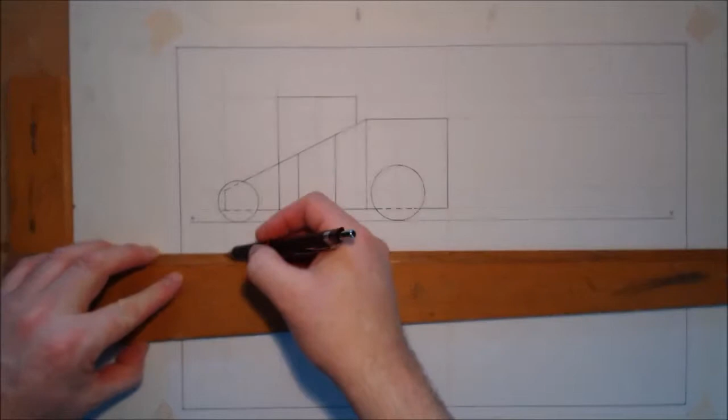Okay, I'm going to continue on with this drawing here now, and I'm going to carry on and set up the plan. Come down a distance from my XY line, draw a horizontal line across. Now,

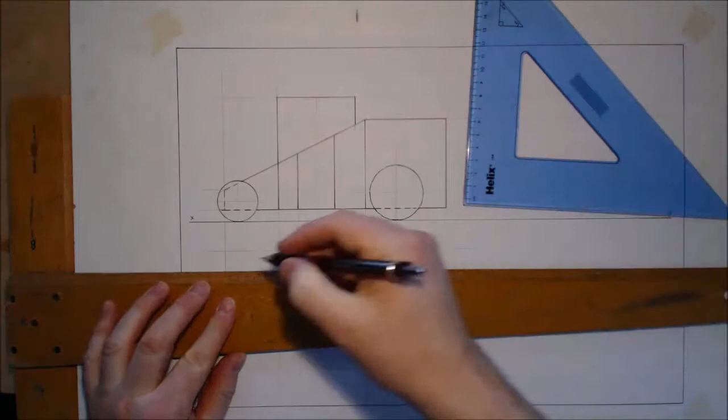I have my drawing set up, my exam paper set up beside me, and I'm working through the dimensions. So, starting off at this line here, off my drawing, I have 15mm thickness of the wheel. So I draw a line across there, 15mm. Then I come down a further

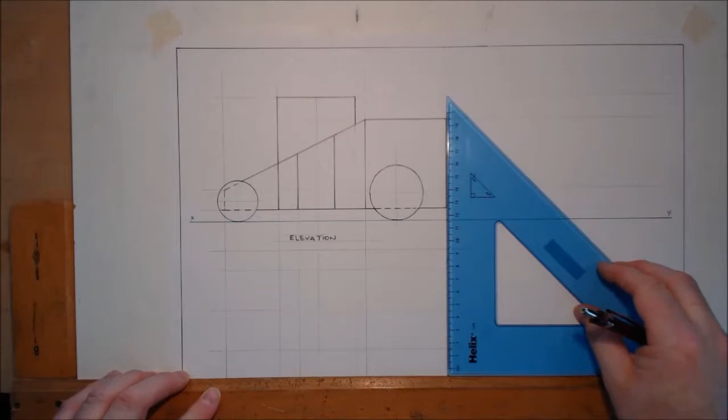62. Now it's actually 31 and 31, and I'm going to need that line in a minute when I go to draw my circle for the cylindrical engine part in the middle. So 31 and 31, and then the last part, which is 15, 62, and then here's my wheel here again, which is a further 15.

So just so a few things stand out, or so I can put a bit of shape in this drawing, first thing I'm actually going to do is take down the sizes of the wheels, and I'm actually going to heavy them in because it'll just help me and help you see the picture of what we're drawing.

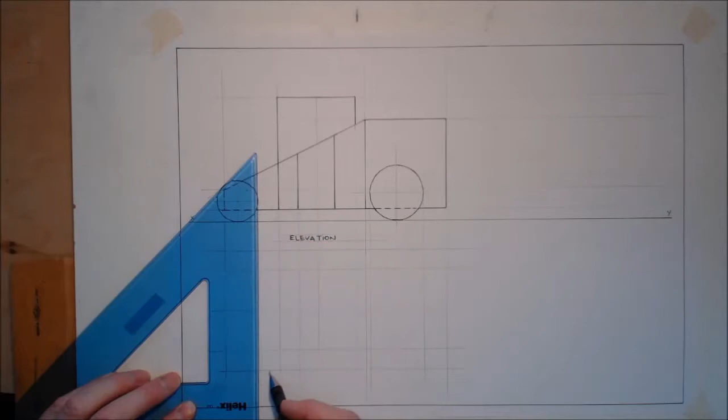Now I've put up a 3D model of this. I've created a link in the folder 2012 higher level question 1. If you follow the link, it'll give you a 3D model, and that will help you as well to see what's happening in each view as we're turning it around. So it's all set up there for you.

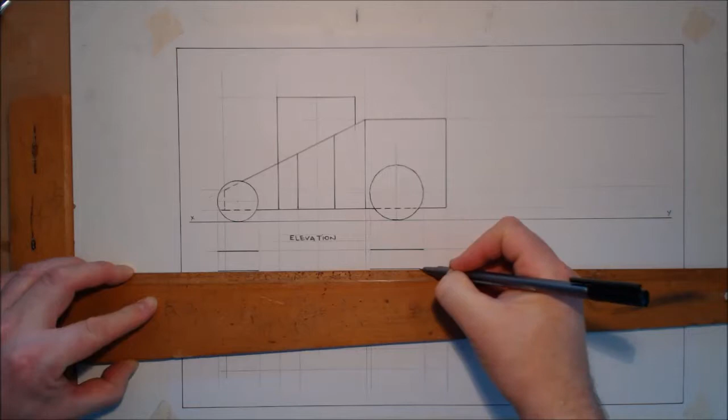Drawing in the wheels anyway first, that's what we're doing here. And of course the wheels are made from cylinders. We see them as a circle here, but when we look down on top of them, we see them as rectangles.

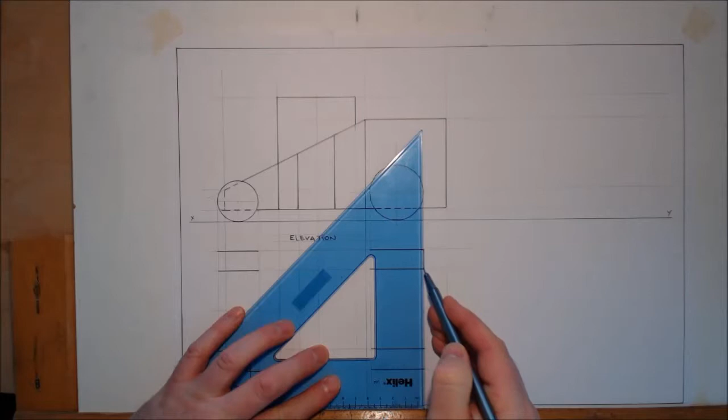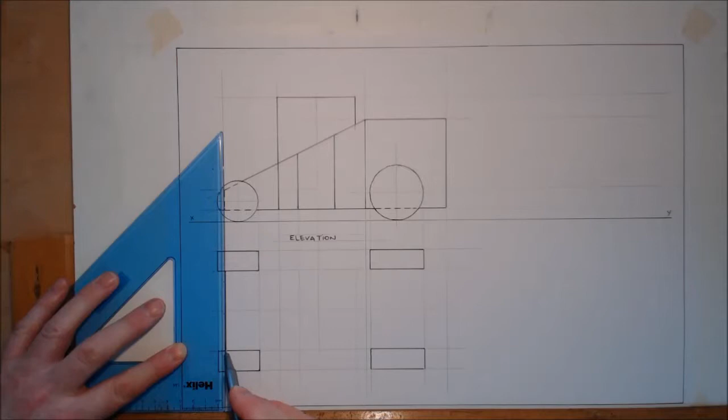So there's the small wheels at the front and the wheels at the back. And I also have that edge there, which can go in along there. And my grass box at the back comes in as far as that edge there, carried down, which is to there.

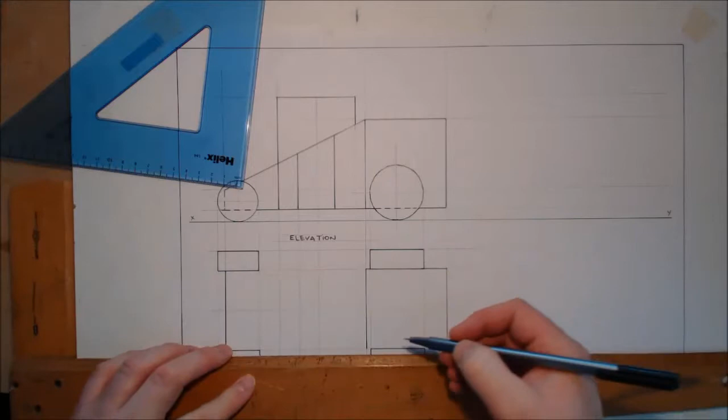Okay, so there's a good bit of information in my drawing there already. Now, there's this area here where that piece sticks out to the side there and there. That's the area we're going to work on next.

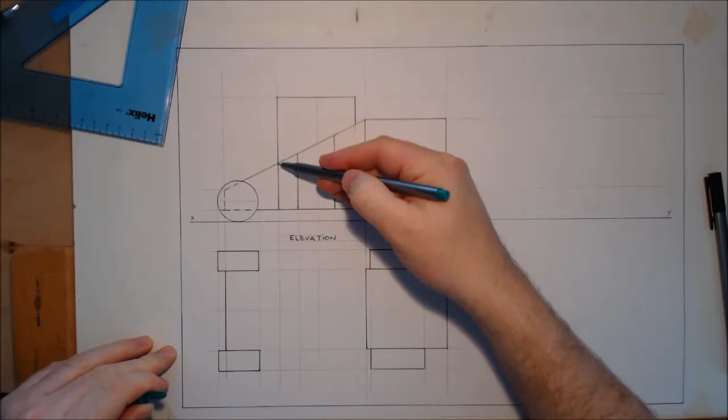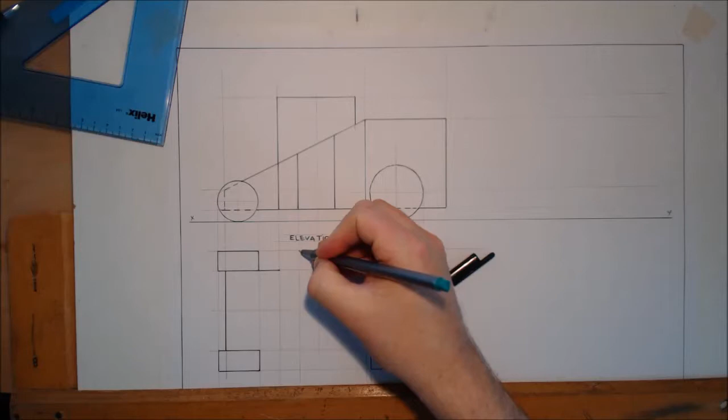So having a look at my drawing here, that point comes down and is located, going by my drawing, here. So that line continues across there until it meets that edge there, that corner there. Okay, this point here continues down, and going by the measurements off my drawing brings me to that point there. So again,

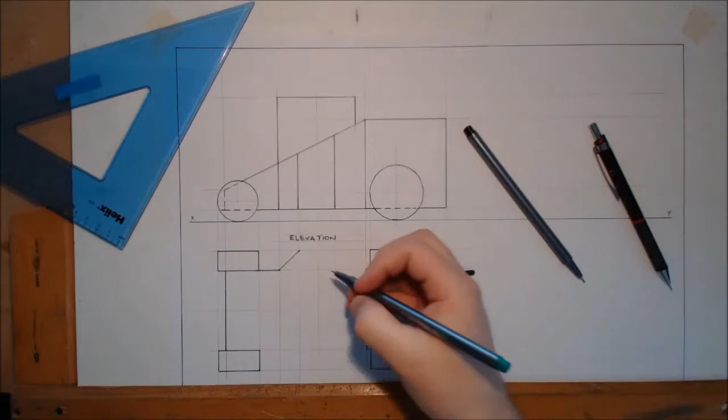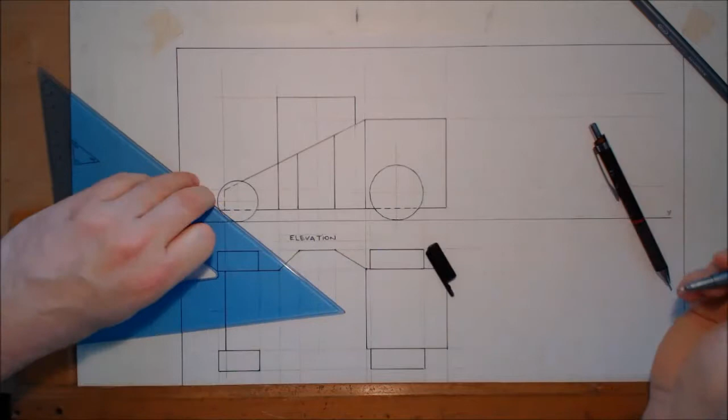that line goes across there like that. This point here, and I haven't carried that line down, so I'll do that now. That line there continues down and brings me to this point here. And the last point here continues back up to this edge here, which is here, and it gives me that side complete. Okay, so that's what that looks like.

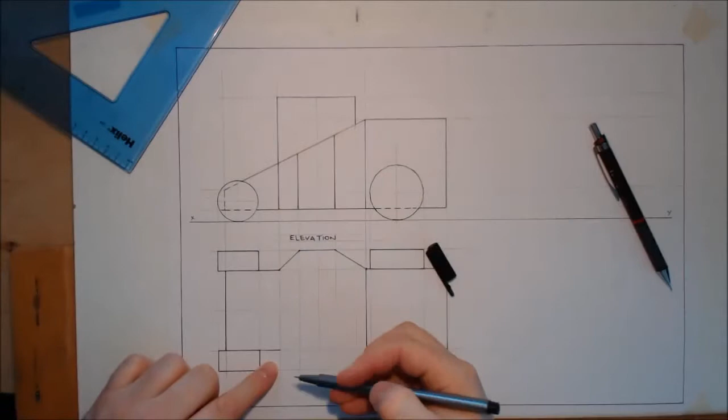So I'm working between my elevation and I'm referring back to my drawing the whole time, and the same on this side here. So if I want to have a look on this side here, that line there will continue, that line comes down, continues there. Okay, that point there is here. This point here is here, and that returns back to there. So the body of my lawnmower at these points here is going to give me this shape here.

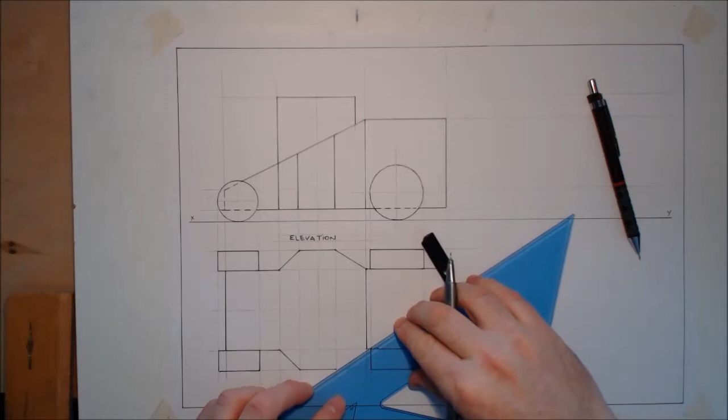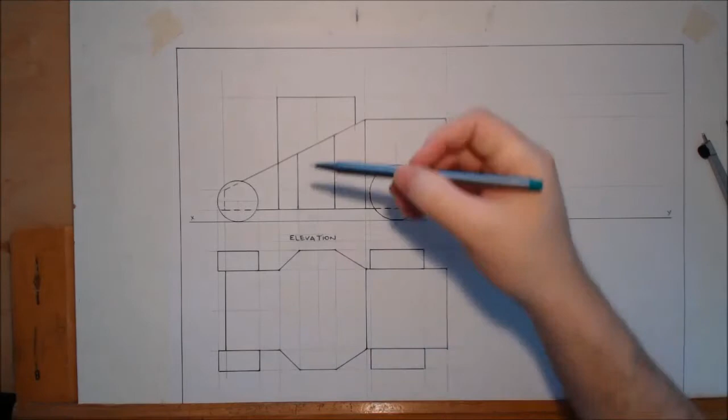Now it's not quite complete yet because we're missing this area here, which is drawn in the middle of the body. So I have continued down the center line here, and that comes the whole way down, and I've drawn a center line here as well. So that means that where those two lines meet, that's the center where I'm going to put the point of my compass and draw my circle.

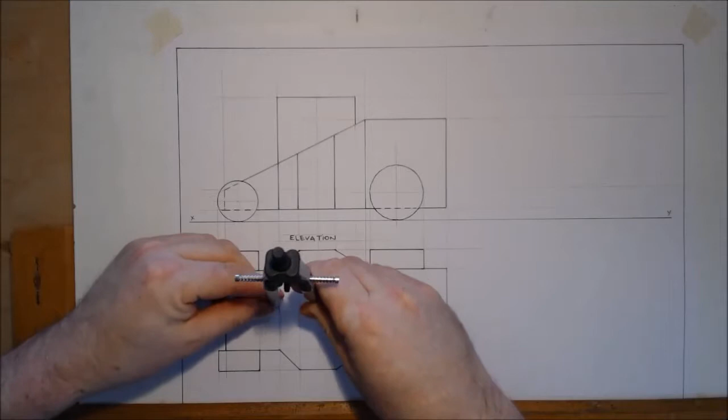That's 31 there on my compass. Put the point of my compass there, but because I've carried the line down, it gives me the point and position to draw that circle. I'm going a little bit over there, it's just a little bit of an inaccuracy, but...

So there is my plan complete. Circle drawn, my plan complete, my circle drawn, this shape here, those points located and drawn in my 1, 2, 3, 4 wheels, and I think I'm pretty good there at that.

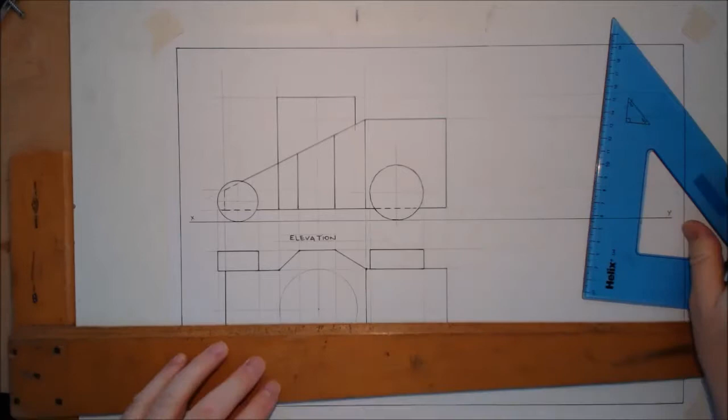So the next thing I'm going to do is set off my end view. I come away a distance from my elevation, 20, 30 mil should be fine, and I draw a vertical line. Now I'm continuing it down a little bit lower.

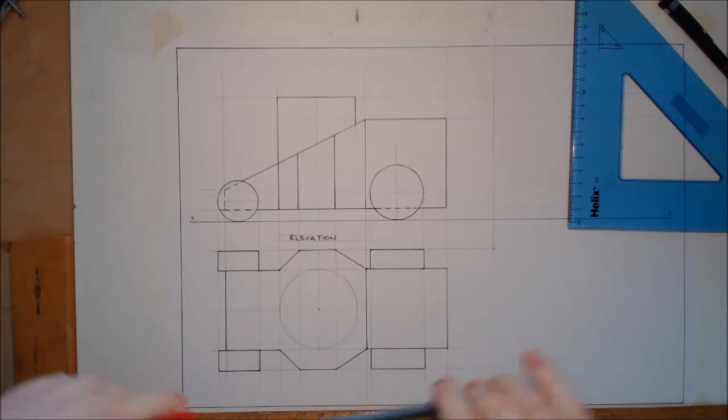Now what I'm going to do is bring the line of my plan across, and where those two lines meet, that's an important point for me, because I'm going to use that to position my 45-degree line, and I'm going to use that line to bounce all my measurements around.

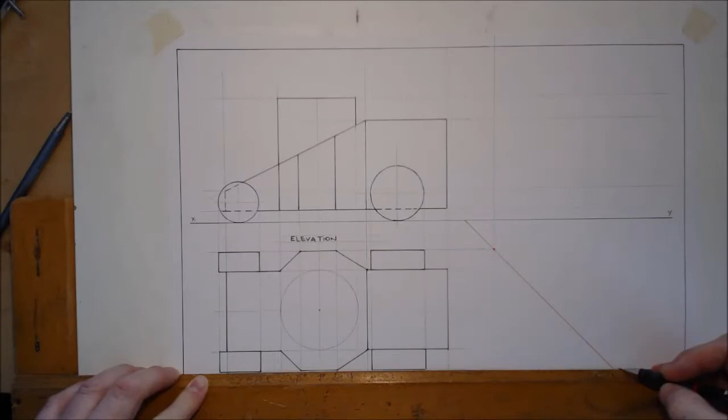So if I want to have a look at what sizes I'm going to transfer into my end view, I can carry all those marks, all those dimensions across. I shouldn't actually have to measure anything in my end view. I should be able to take every single thing, or almost everything, off my elevation.

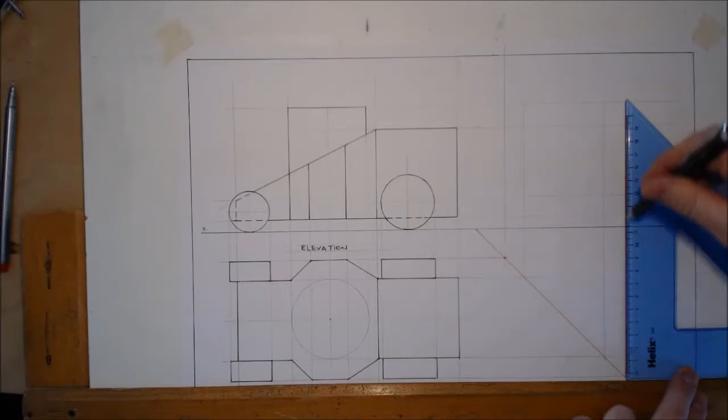And like I did in all my other views, the first thing I'm going to draw here is the wheels. Now I'm looking in this way. The end view is drawn in the direction of arrow B, which is looking in there, so I draw what I see here on this side. So I'm going to just carry across the heights of my wheels. There's the wheels at the back, there are the wheels at the front.

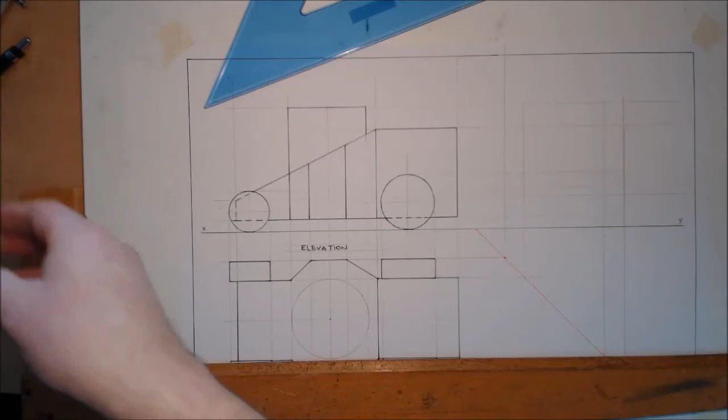Now the wheels at the back aren't going to be visible, so I may be able to put in some hidden detail on the wheels in the back later on, but just to make the picture a little bit clearer, there's my wheels carried across, and up two lines there, so I'm going to draw in a wheel on either side, and that'll help frame our end view a little bit, so that we can see things a little bit clearer.

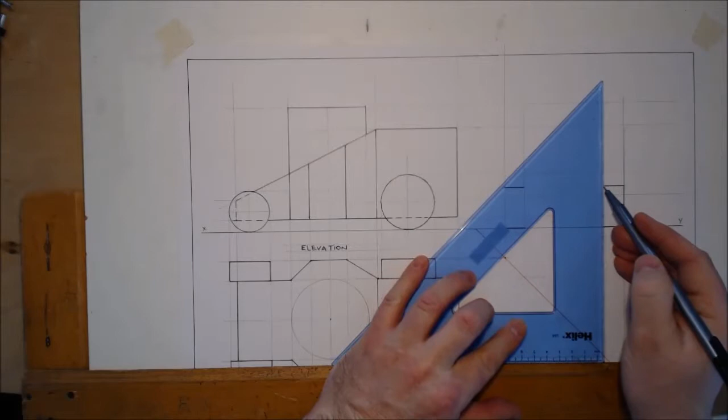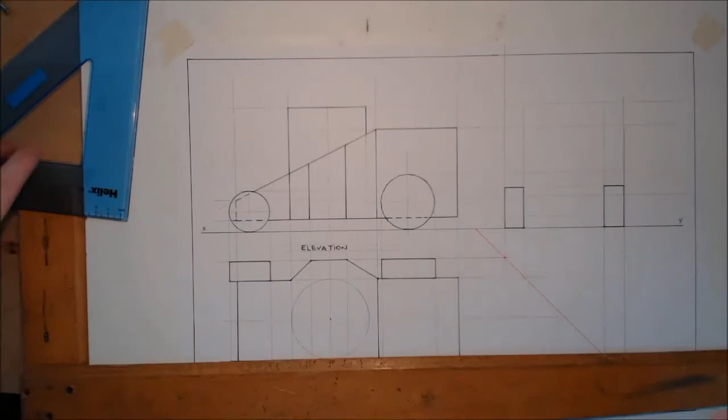Okay, so there's my end view set up. I pretty much have everything, all my information there from my end view. All my measurements are in place from my elevation and my plan. So now all I need to do is actually draw in my end view.

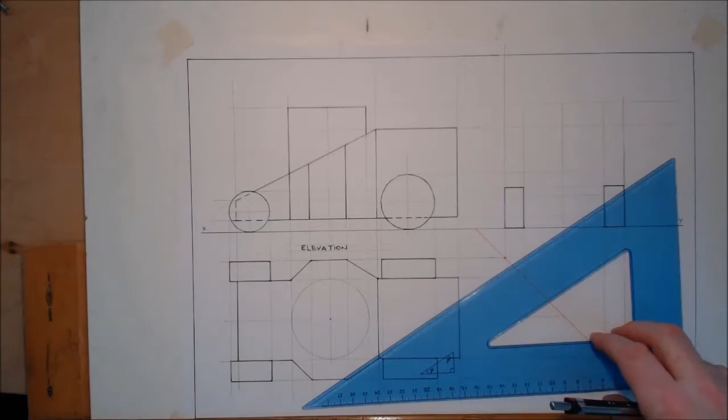Now, the same things kind of come up in these questions, and what they're looking for here is that you can identify that this cylindrical piece is cut by a cutting plane that's at an angle to the horizontal plane. So if I take a cylinder and cut it parallel to the plane that it's sitting on, I'll get a circle, okay?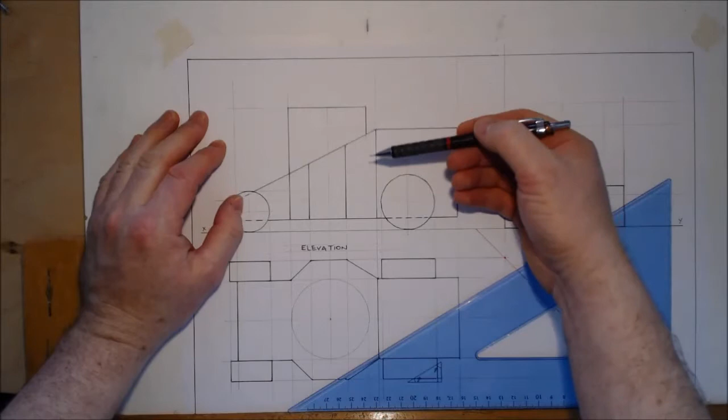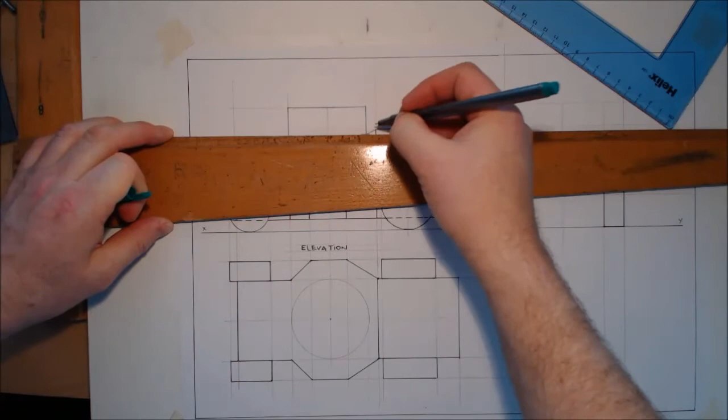But if I take a cylinder and cut it, and in this case it's been cut by the sloped surface there, at an angle, what I'm actually going to get when I look in my end view is an ellipse drawn, and when I look in from the side, I'm going to see a minor axis, which will be from here to here, and a major axis, which will be from here to here.

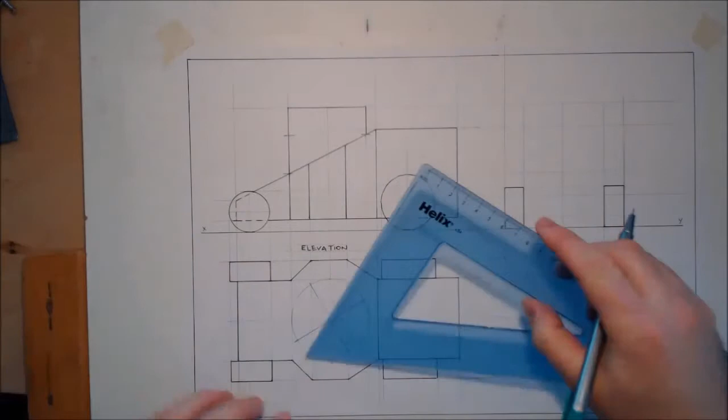So what we're going to do to actually locate those points is divide my circle in plan into 30s and 60s. We're going to index all our points, and then we're going to transfer them around into the end view so that we can bring all those points around and draw and complete the end view.

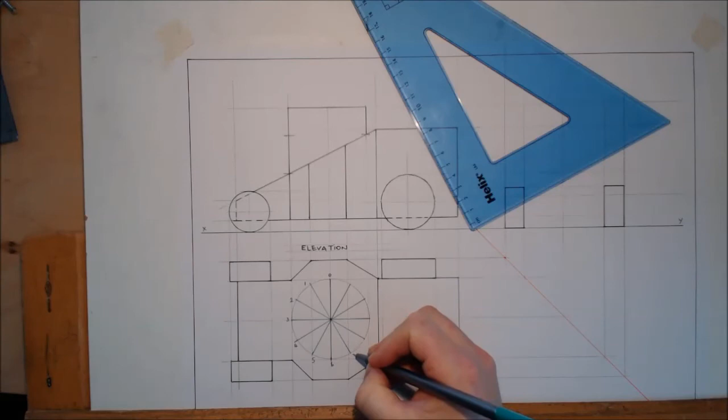I'm going to start here with 0, 1, 2, 3, 4, 5, 6, 7, 8, 9, 10, 11, and back to 0. Okay, now I'm going to pause the video here, and you're going to have to go to part 3 of the video to see the end view completed, because just in case I run out of time.